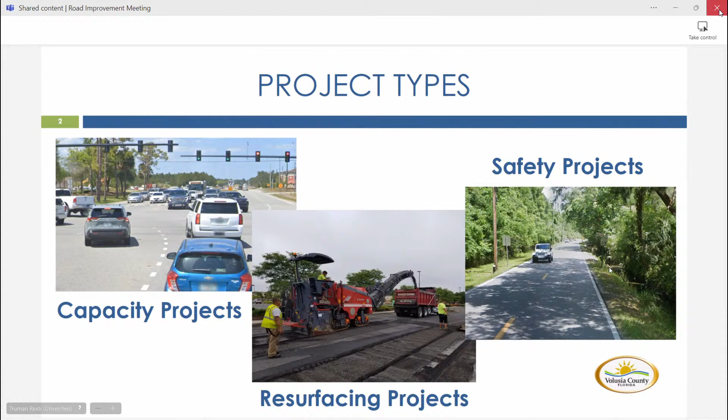All right, the first part of what we're going to talk about is how do we pay for our road projects, so that you can understand what we've got to work with. We discussed the revenue. The first part of our revenue stream for building roads comes from the local option gas tax.

Our county levies the max allowed by the state, 12 cents per gallon. That number stays the same whether gas prices go up or down. The state and federal gas taxes are indexed, meaning that if gas prices or inflation go up, they go up as well; if they go down, they drop as well. But our number is locked in at 12 cents.

The nice thing about local option gas tax is that it can be used anywhere in the county. That's not the same for impact fees. Impact fees are collected anytime a developer builds something, or anybody builds anything, whether it's a home, a business, those types of things. They're creating an impact on the adjacent road network, and therefore they have to pay for that impact.

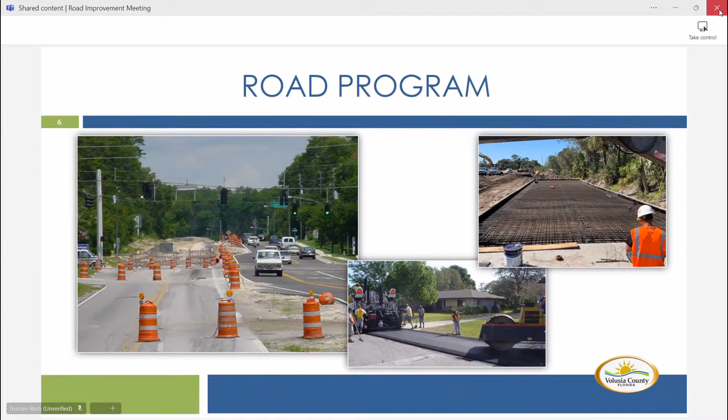The projects that we're working on right now we call our road program, and we've divided the county up into 4 different zones. We're going to go through each of the zones and discuss each of the projects that we're currently working on, so you get an idea of what we're doing.

Each individual road segment has a capacity assigned to it by our traffic engineering group. They take a look at the conditions of the road, simple things like the number of lanes are our primary indicator, but on top of that, if you have a large number of signals, or a large number of driveways, different things can affect the capacity of that road overall. And they establish that capacity as a level of service.

Each year they go out there and take traffic counts on each road segment on our thoroughfare road network. Roads that are over capacity, where the counts indicate we're past the level of service, are marked red. If we're getting close, 80% or above, then we're in the orange. So you can see this is what the situation was back in fiscal year 21.

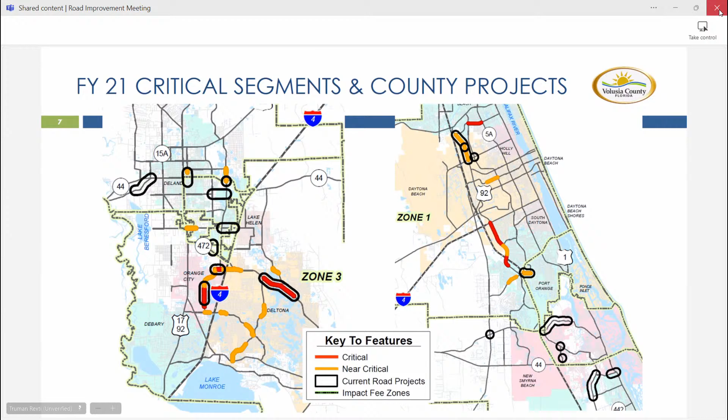We also have some sections you'll see, particularly in Zone 2 down in the southeast, where there are no colors on the road, but we still have a black outline. Those are the safety projects, where even if there's not a red or orange section, we're going ahead and improving the safety on that particular road segment.

Just because we have funded the project doesn't mean all the phases of it are funded. We have several on this list where we funded the design portion of the project, but we have not funded the construction as yet, simply because we don't have the budget to do so.

In particular, a vast majority of these projects got funded when we had money become available. So, for example, number 8, the Williamson widening from Beville down to Madeline, was actually the first project we had full funding for in this program.

Part of that was because it was near an Amazon distribution center project, and in coordination with the city of Daytona and ourselves, we earmarked their proportionate fair share money specifically to this project to help alleviate the traffic problems in that area. We were then able to supplement that money rather easily and move that project forward before some of these others.

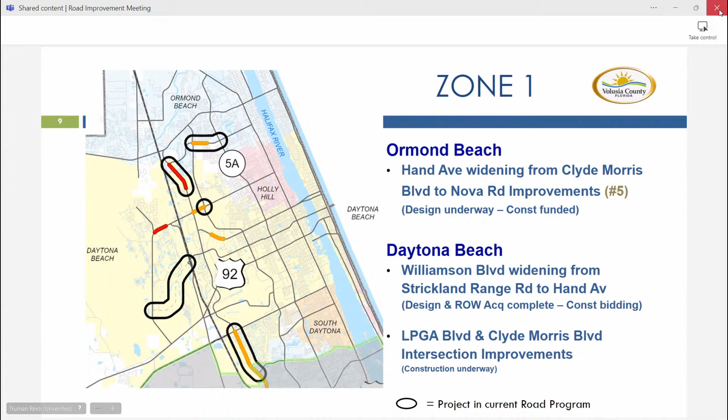So we are moving into construction as soon as the council approves the construction budget or contract for that project. We're also working on LPGA and Clyde Morris intersection improvements, adding a second left turn lane on the northbound portion of Clyde Morris, along with some other turn lane improvements in that area. Overall, we're at a point where we're in construction and working on that.

Also working on the Dunn Avenue extension from Tomoka Farms Road to LPGA Boulevard. This one is funded for design but not yet funded for construction. The cost of the bridge over the Tomoka River has pushed this project back. We're working towards that, and we may actually split the project into 2 parts so that we're not stuck waiting for the whole thing based on the funding we have available.

We're also working on Williamson Boulevard down at the south end, between Beville and Madeline. That's a 2-lane section that we're going ahead and widening to 4 lanes. The entire project, both design and construction, is funded.

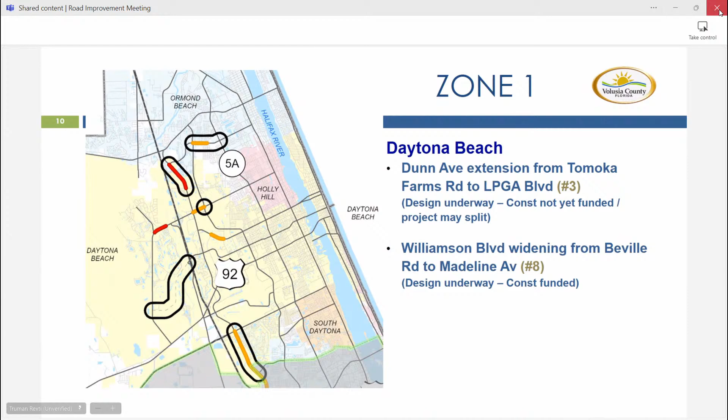We basically call it on the shelf, ready to go. It will need to go through an update, but it doesn't make sense to do that update now, because if construction isn't yet funded, conditions could change and we'd have to redo it again. So we have it ready to go for an update if construction funds become available.

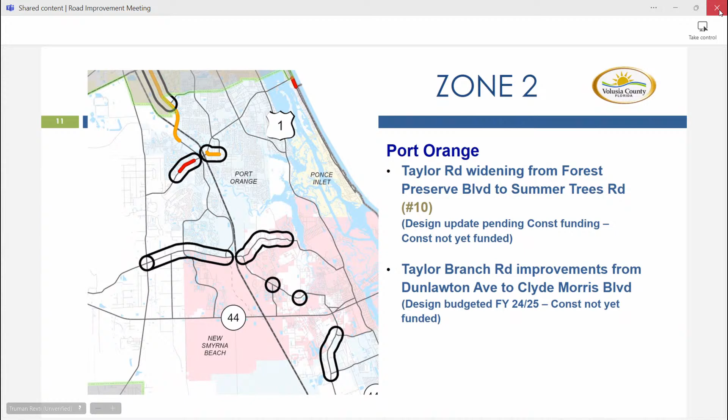In the New Smyrna Beach area, we've got the Pioneer Trails and Tomoka Farms Road intersection improvement. This is basically turning that 4-way stop next to the Cabbage Patch into a roundabout. It will improve safety—we had several fatalities in that area and quite a few bad accidents. So we're getting rid of that four-way stop condition and putting in a roundabout. It's listed as a capacity project, but it's really more of a safety project overall, though it will do both in this case.

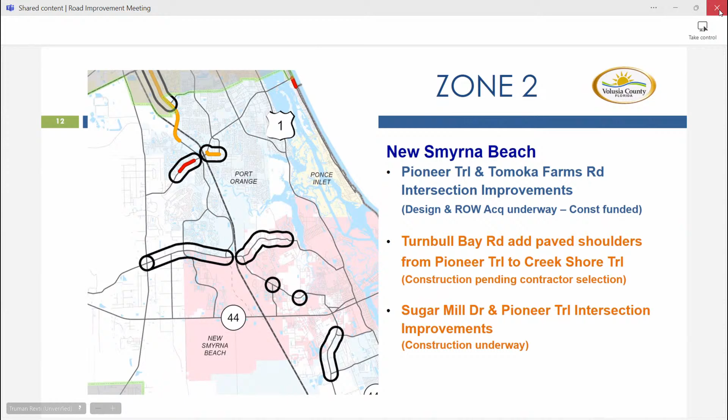Also in that area, we're working on Sugar Mill and Pioneer Trail, another project that's under construction right now. In this case we're adding a signal and turn lanes to what was a four-way stop.

Pioneer Trail and Williams, we're making some improvements at that intersection. We'd previously studied it. That was the number one priority on the previous council's list, predominantly because it was so cheap, but also because it's safety related and we want to improve that situation as soon as possible. We'll be making improvements that increase sight distance and reduce accidents there.

The next project, Old Mission, is the first of what we'd consider a capital safety project. In the past, we'd always funded things like intersection improvements because they were cheaper and we could afford them. But we've now started setting aside money for larger safety projects.

If you're familiar with Old Mission through New Smyrna Beach, Edgewater, in that area, you know there's a rather large canal or ditch immediately adjacent to the road, in some cases so close there's not even room to put guardrail. Under this project, which we're in design on right now, we're going to shift the road at the southern end so it's farther from the ditch, and on the northern end we'll shift the ditch farther from the road. Either way, improving conditions out there overall.

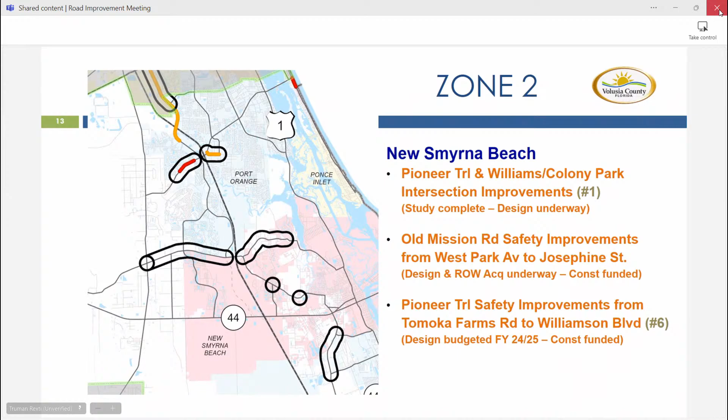Pioneer Trail Safety Project is from Tomoka Farms Road to Williamson. It's basically a similar situation, with ditches on both sides. They're not as deep, but you have that same situation, and the roadway itself is narrow on top of it. So if there were an incident where you had to swerve to avoid something, you'd end up in the ditch. This is the second project we earmarked as a capital safety project, and we'll start design on that next year.

Moving into Zone 3 in Orange City, we've got the first of the Veterans Memorial projects. We had a small section south of Rhode Island that was still two lanes. Under this project, which is under construction right now, we'll be four-laning all the way up through Rhode Island, including the intersection at Rhode Island. That's predominantly development funded.

Veterans Memorial Parkway extension from Graves Avenue to 472. If you live on this side of the county, you're familiar with the jog that occurs right now. Veterans Memorial basically tees into Graves, then you have to head east if you want to keep going north on Graves to Kentucky, then north on Kentucky, which becomes Martin Luther King, which then becomes Kepler. What this will do is make a straight connection from Veterans, extended all the way up to 472, where it'll tie back to Martin Luther King.

So we're very excited to get this one going. It says design is pending, but we've actually started design. We've moved forward since this was originally set, and construction is funded for this, so we're moving on it as quickly as we can.

We also have a section of Veterans. As I said, the first project extends the four-laning up through Rhode Island. This third project would take the four-laning from Rhode Island all the way up to Graves. This one is funded for design, but we haven't yet funded it for construction overall.

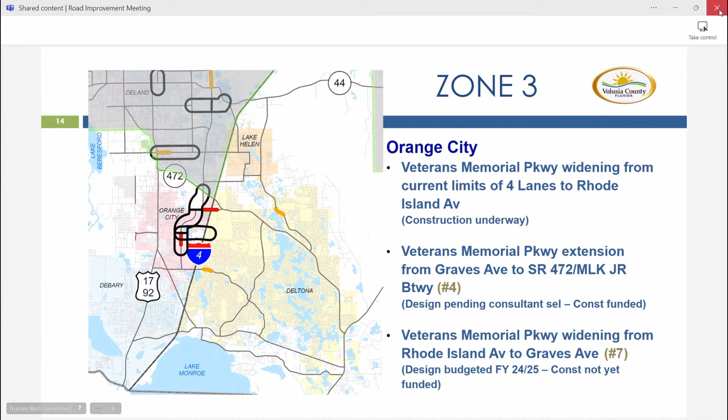Also in this area, you've got the Rhode Island extension that would carry Rhode Island from Veterans Memorial at the intersection we just talked about over to Normandy, including an overpass over I-4. This is something that's been on again, off again, as I mentioned with the Taylor project done back in 2011. This is the same thing.

This was a project designed back in that time frame. It actually was funded for construction, but when the school board moved the high school site from DeLand down to Orange City, we ended up shifting the money from this project to build Rhode Island to the west to accommodate the high school traffic. So it's been sitting in limbo since then.

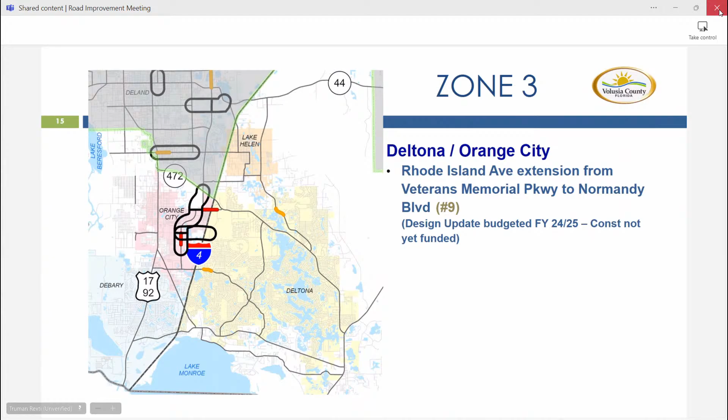We're going to go ahead and start working towards getting it funded. We've got to go through the design update. Construction isn't yet funded on this, but we do expect it. We've been working quite a bit with the city of Deltona. They've got a desire for this ultimately to be an interchange. At one point, the Department of Transportation, as part of their larger beyond-the-ultimate project with the express lanes, was going to bring the express lanes all the way up to this intersection and stop, and this was going to be an interchange specifically for the express lanes.

That has not stopped, but they have pushed it quite a bit back based on their lack of funding for that project. So anything we design out here will be in coordination with both the city and the Department of Transportation to make sure we don't design something they have to tear out and throw away. Bridges are not cheap, and we certainly don't want to waste one.

Moving into Zone 4, we are currently working on the Amelia Avenue lane reduction, from Voorhis to Ohio. This is taking out what was a 4-lane section and creating a 3-lane section to accommodate the turns that were causing problems from a safety standpoint overall. That's currently under construction right now.

We've also got the Beresford Avenue extension from Blue Lake to Martin Luther King Kepler. That is just now starting construction. The contractor was approved at the last council meeting, and they're ready to get started on that. And then east of that, we've got the Beresford extension from MLK Kepler over to State Road 44.

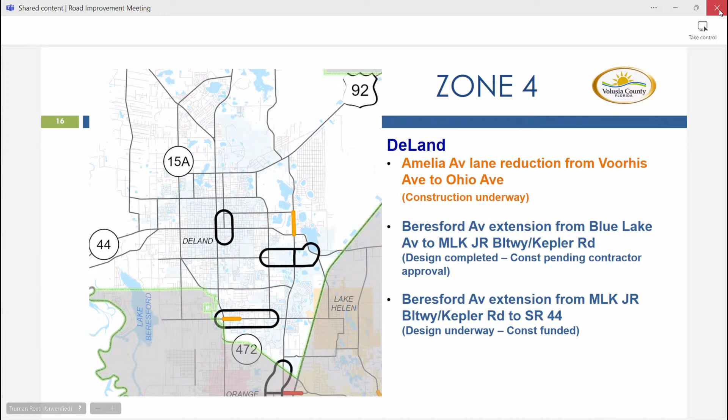That project is in design. It does also have construction funding available based on the amount of money that development has paid for their projects. And then, as I mentioned earlier, we've done a study on Orange Camp Road to look at the improvements necessary from Woodland over to Blue Lake.

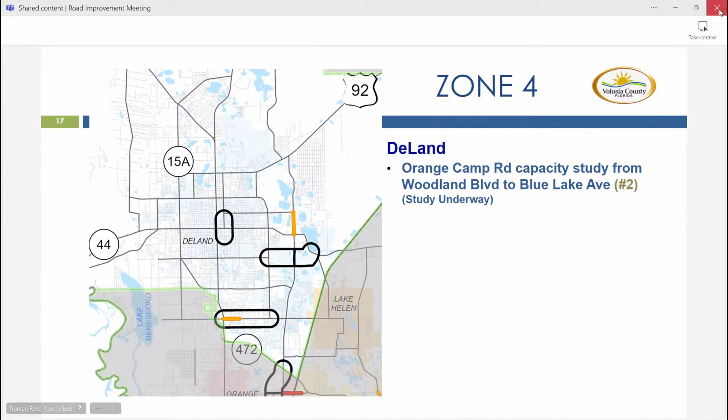If you're familiar with the new Publix down in that area and the section of Orange Camp east of 17-92, you know there's quite a bit of confusion on the traffic pattern over there. Based on the study we've finished, we're going to be taking some recommendations to the council, and we expect they will approve a particular group of improvements, which will be programmed into this next priority list, taking up the funding I mentioned earlier that's currently not yet allocated.

So those are the things we're working on. Next, we want to talk about what we're proposing to the council for their consideration on this next priority list. Before we do that, though, I think it's always good to point out certain things that we didn't recommend and why we didn't recommend them, even though some people may say, hey, that makes a heck of a lot of sense.

Over on the east side of the county, LPGA, as I mentioned in that zone earlier, there's quite a bit of growth. LPGA is ground zero for a lot of that growth, and it would certainly make sense, you would think, to go ahead and expand that from 2 lanes to 4.

That said, we did not recommend that to the council because even though the road is still ours at this point, we are working on an agreement whereby it gets transferred to the Department of Transportation. They've been working on a study and design for that section that would improve its capacity as well as the interchange, which is their primary concern, getting that widened out to handle those capacity problems. So it doesn't make sense for us to spend money and then have them change it or do something different. We're not recommending anything to LPGA.

Over in the Deltona area, Saxon Boulevard east of I-4, there's a similar situation to what I mentioned at Orange Camp. You've got a lot of different traffic patterns going on in that area, but the Department of Transportation has been considering changes to their interchange, which would have an effect on anything we design or construct. So we're going to wait to see what happens with that and see what effect it has on the traffic pattern.

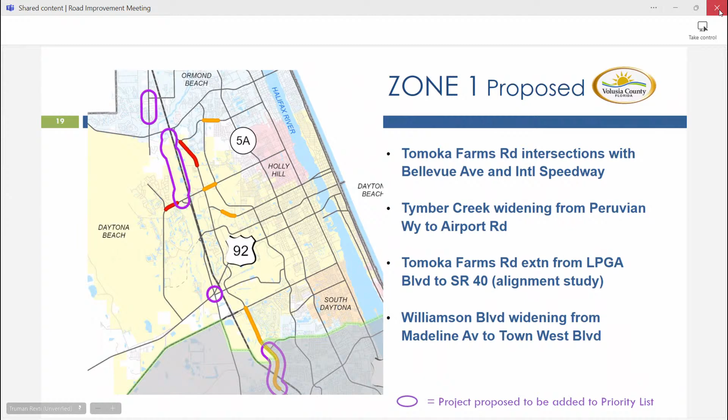In Zone 2, we're recommending to the council that we go ahead and design the southern extension of Williamson from State Road 44 north to Pioneer Trail. Most of the property in this area is owned by the Utility Commission. There's no interest from them to design and construct this road for us for some reason, but what we'd do, just like before, is design the road and put ourselves in position to potentially get a grant from a state or federal agency. Ultimately it would work out as a great alternative to I-95, particularly when the Department of Transportation finishes their interchange, providing another way to move traffic in that area.

We're also recommending to the council addressing a longstanding problem on State Road 44: on Saturdays, Sundays, and good beach days, it's slammed with people going to the beach from Orlando, and anybody living in that area has a hard time going east-west since State Road 44 is the main artery through that section. So alleviating that and giving residents an alternate route is what we're looking at. The county has widened 10th Street on the eastern side, east of this project, to 4 lanes throughout. This wouldn't necessarily go to 4 lanes, but would continue that to create an east-west thoroughfare as an alternate to State Road 44.

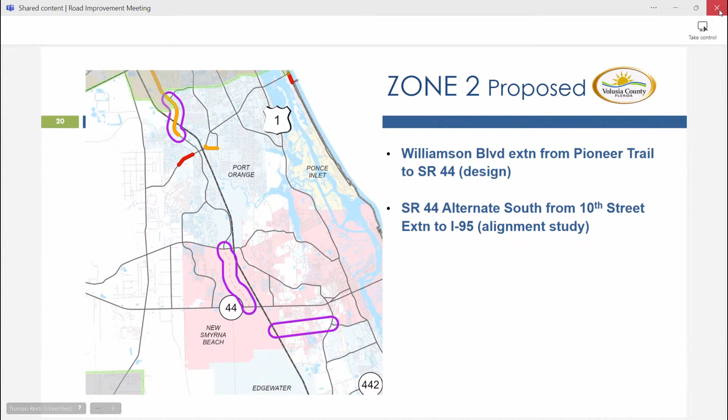In Zone 3, we're making two recommendations. The first is to tackle the capacity issue between Catalina and Haulover Road. That section sees a large amount of traffic before and after work. You've got a large commuter crowd that comes up Catalina, turns down that small section of Lake Helen Osteen, then east on Haulover Road. What we'd look at doing is adding a potential lane specific to the turning movements, so anyone who just wants to go north-south on Lake Helen Osteen Road isn't hampered by that group wanting to make that turn.

We'd also take a look at Howland Boulevard. We just finished widening that entire stretch to 4 lanes, so it's time to start looking at more, I guess. But that western section in particular has been a little bit strange when you take a look at what the traffic counts have been over the last 5 years. 4 years ago, it was above capacity, then it dropped to near capacity, and now it's actually under capacity. We think that's more of a quirk than an actual indication of the traffic situation. Anybody that's been on that section lately will tell you it seems pretty packed. So we're going to take a look at that aspect.

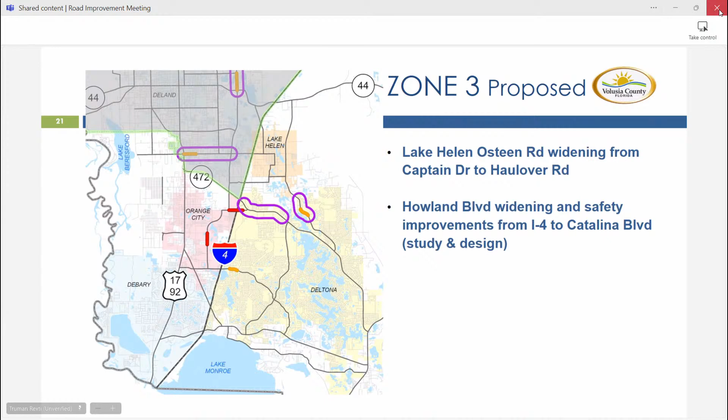We're also going to take a look at it not just from a capacity issue, but also for a safety issue. We've got 2 intersections over there in particular on adjacent local roads, Loblolly and Red Apple, where you have sight distance issues. If you're looking to the west, you have a hard time seeing over a small rise that's there. If you're in a small car, you definitely have a hard time seeing oncoming traffic. So we'll take a look at solutions to those particular problems as well.

And then in the last zone, Zone 4, as I mentioned before, we studied Orange Camp. We expect to take our recommendation to the council for that study on what to do here in the near future. This would be our recommendation to move into the design and construction, or fund the design and construction, of that selected alignment or path.

We also recommend taking a look at Kepler Road. That section north of State Road 44 is a problem in terms of a large number of residential homes with driveways on a relatively high-speed road, and those two things just don't mix well. So we're going to take a look at studying that aspect to see what we can do about limiting certain elements, or putting in turn lanes. Different things will be considered to attack the issues we've got on that section.

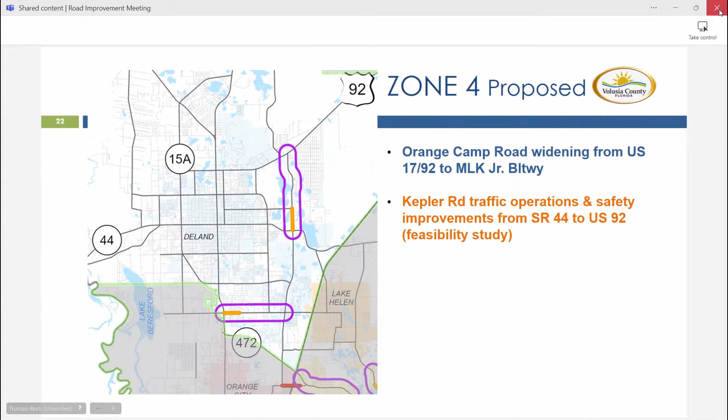That said, nobody on the staff drives every road in this county regularly. We know there are other problems out here that we may not have identified. So part of what we're asking you to do is identify your top 5 priorities. It can be a road on this list, or it may not be. What I'd say is all we can spend money on are county roads. So if you have a problem with I-95 and put I-95 down, I can't do anything about that. I'd recommend you save your vote for one of the county projects or roads. Identify what you want to see done overall, so give us your top 5. And then in particular, from the zone you represent or live in, tell us which one is most important to you. Every zone has multiple projects we've listed. I'm sure you've got others you'd like to see, but for your particular zone, what's the biggest issue you'd like addressed?